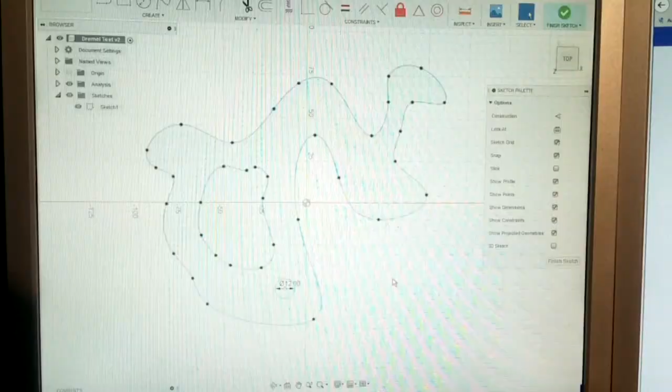You're going to need some basic CAD knowledge. I'll be making it in Fusion 360, but most CAD packages should be able to do something similar. First, we'll start with our design - we'll call this one the blob. Step 1 is offset the edges inwards 1.2mm. This will give a little clearance between the cutting tool and the template.

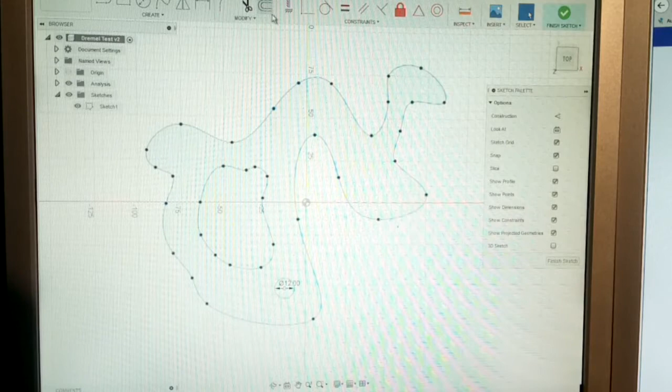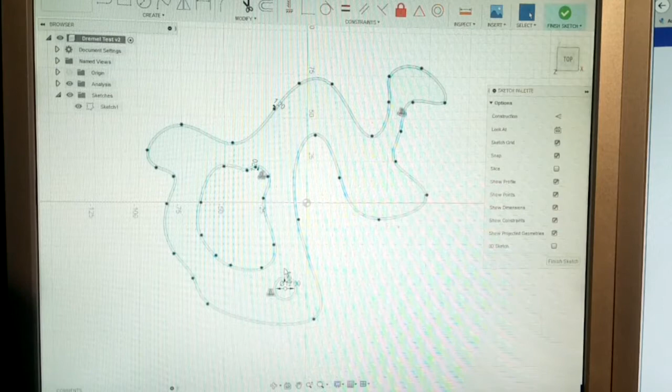Step 2 is to offset the edges outwards 12mm. This is going to make our support rail, which gives the guide on the Dremel more support, makes it easy to keep it straight. You can get away without it, and in some parts of the design it's not needed, but it definitely makes the cutting operation easier.

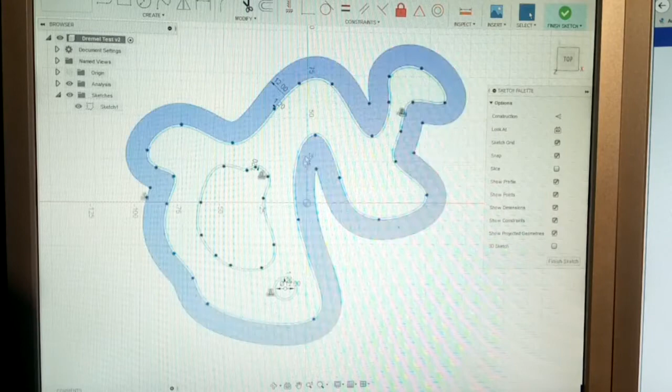Next step is to offset the edge outwards about 22mm. The exact distance isn't that important, it will depend on your model, but a 10mm wide support rail is a good sort of width.

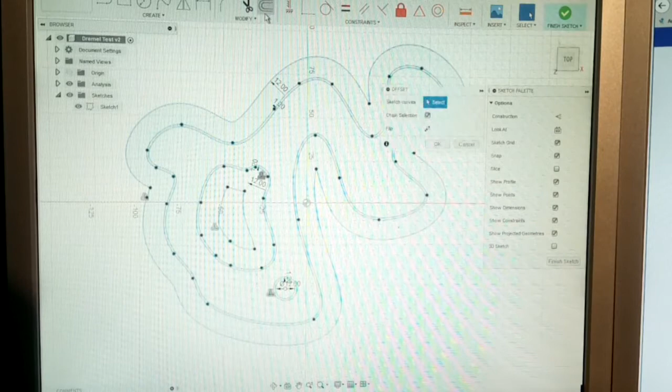The next step is to extrude your rails upwards 6mm. Now extrude your template up 3mm. Next, start a new sketch on the top face of your template and offset the outer edge in 3mm. Now you want to extrude the inner part of your template up 3mm with a 15-degree taper.

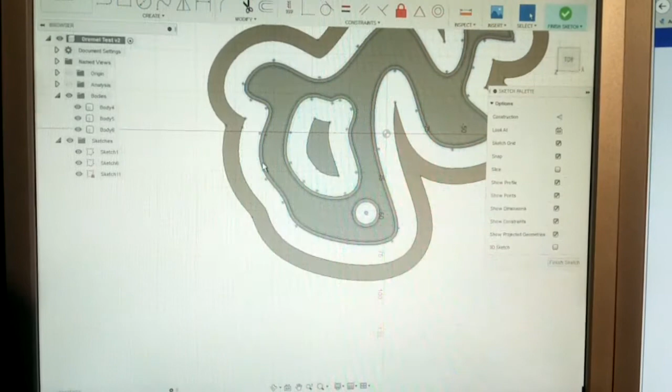Now we need to make pinholes to hold it down. Start a new sketch on the top of your template. Offset the edge inwards 4mm or so - the exact distance will depend on your design and you can play with it a bit.

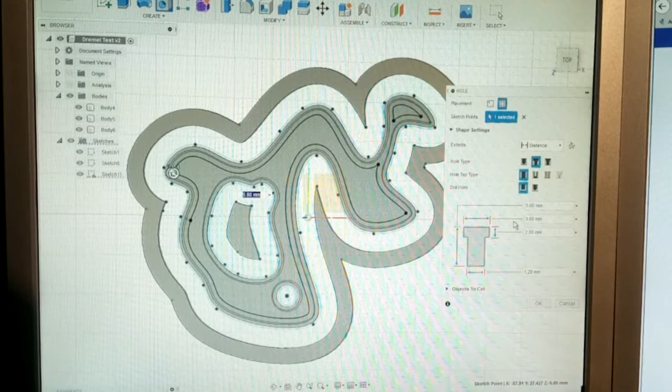Now I need to drill a hole somewhere on the line you just made. You want a counterbore hole with a counterbore large enough to take the head of the pins you will use to pin it down. Here's a 5mm counterbore, 2mm deep, and a 1.2mm hole that doesn't extend all the way through, as you're going to clean up the holes with a drill at the end anyway.

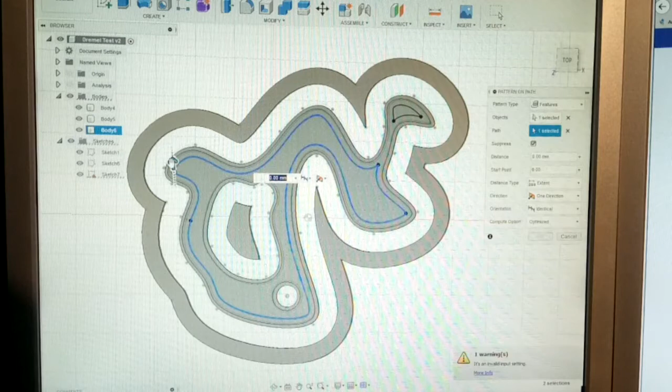Now you want to run a pattern of holes along the offset line. The number and spacing is up to you, but you want a reasonable number. Fill in any missing sections or places that look like they may need an extra pinhole with some more holes.

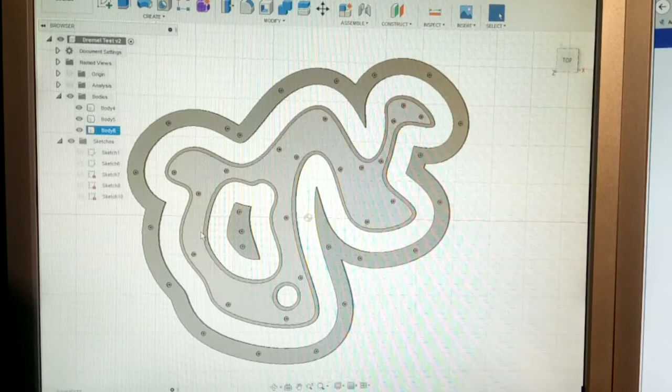Now do the same with your support rails. And there you have it, one blob template. Here's just a look at the cross section so you can see exactly what it looks like - that's what you just made.

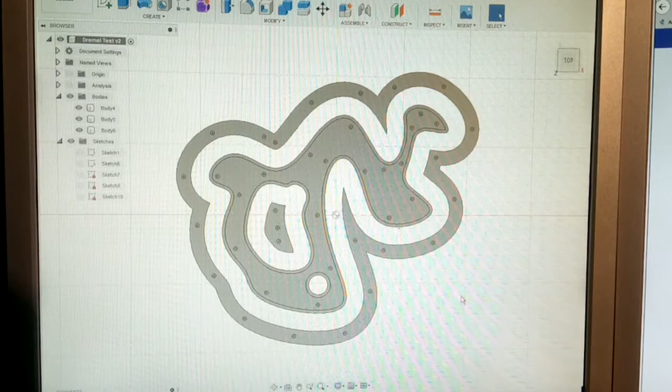Now we need to pin it down onto our foam. Use a piece of scrap foam or some cardboard thick enough to pin into as a backing. I'm using a piece of 10mm EVA foam here for the example, and some cardboard as a backing. It's a little bit small and the support rail hangs over the edge in a couple of places, but it should be fine.

The limit of the router bit is about 12mm, so you can stack two pieces of 6mm foam on top of each other and cut both at once, no problem to get two identical pieces at the same time. Position the support so they're evenly spaced for the template, but it doesn't have to be perfect. For this template over here that has straight sections, I made some spacer blocks that make it quick and easy to set up.

Use a tool such as a punch to push the pin heads down below the surface. It's important to note that the good cut edge will be to the left of the bit in the direction of travel. So for an outer edge, you'd be going anti-clockwise, and for an inner edge, you'd be traveling clockwise.